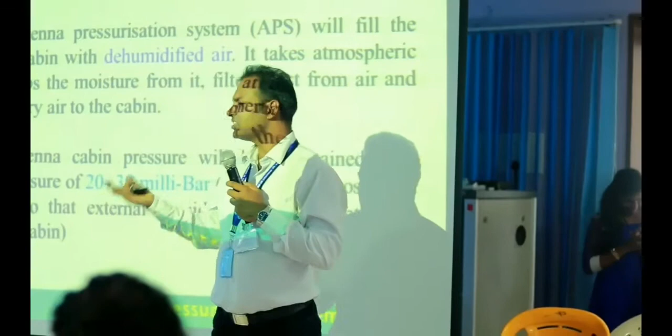But I really don't know what is the difference in pressure level from top to bottom. What is the difference, the range? Can anyone tell me, just approximate range? It may be variable, but just guess - a wild guess if you don't know. What may be the difference between pressure on top of the fin and on the bottom of the fin? Just a guess, tell me any figure.

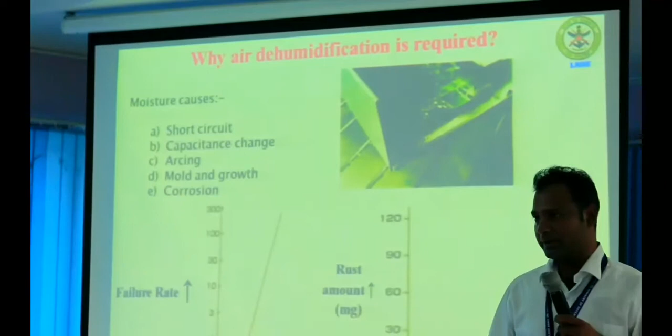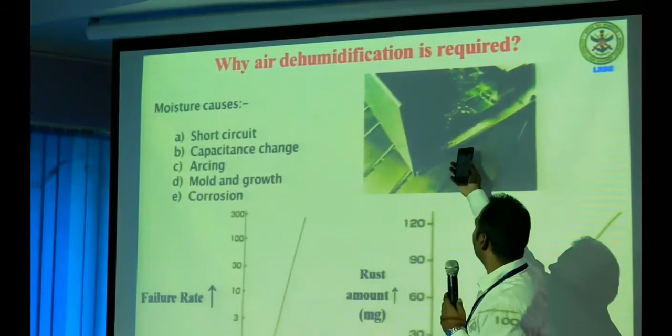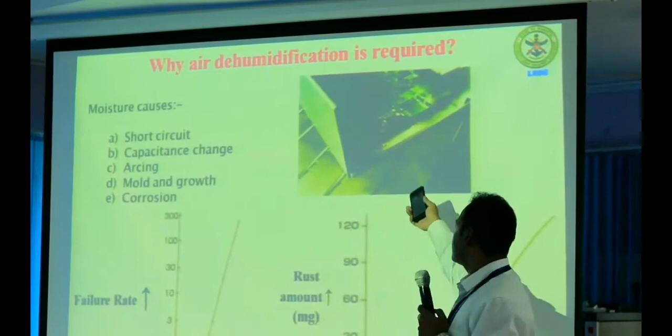What is the problem with moisture in the system? As you may know, if moisture is there, this picture shows deposition of moisture on this cabin, which is called the cabinet of the computer. Inside there is a deposition of moisture. If such deposition happens on any electronic system, there will be a short circuit.

Then mold growth. Mold is a biological formation you might have observed on some systems. If it is kept in a humid environment, biological growth happens on the system. So these are the problems associated with humidity, which is why this dehumidifier is required for the radar system. Corrosion also happens.

It is seen that if humidity level is between 40 to 60, rust formation is minimum, similar to how failure rate is dependent on temperature.

Can anyone guess what happens if humidity is 0%? There will be a problem for us too, we will feel very uncomfortable. In the same way, electronic chips also cannot survive at 0% humidity. Pure air is also not good. If humidity is less in the atmosphere, we feel uncomfortable, and chips will degrade. Moisture will constantly come out from them, and they will slowly degrade. It is an observed phenomenon that if moisture level is kept from 30 to 40%, it gives the best performance for the system.

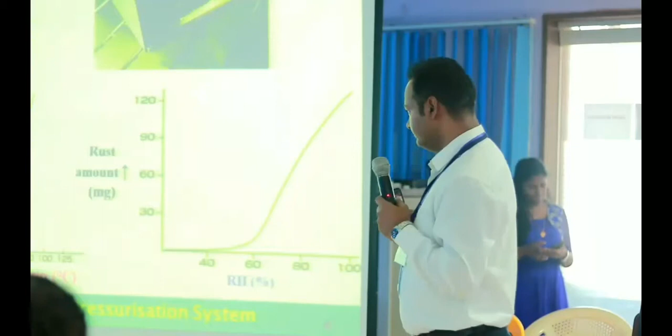So what was the requirement? I know all of you are feeling hungry.

Based on the antenna cabin size, it was required that the system should provide 1650 liters per hour, based on the size of the cabin. The pressure requirement was that it should be above atmospheric pressure. Then humidity reduction required a 20-degree dew point reduction, covering up to 95% of the humidity level in the air.

Then there was the size constraint. Initially the constraint was that I had to design a system that should be half meter by half meter by half meter, a cube of half meter edge length, but it could not be done. So later that constraint was revised to 0.6 meter by 0.6 meter, and height was strictly limited because the antenna was rotating, kept on a pallet where there is a stationary portion. So the gap between this stationary frame and the antenna was only 600 mm, and some clearance was also required, so height was strictly restricted.

Apart from that, there were some weight constraints, because it is a mobile radar on a vehicle, so weight should be less, power consumption should be less, and it should have a remote communication system, so Ethernet links and all.

This is the calculation. I will not go through the calculation of how this has come, the flow rate requirement.

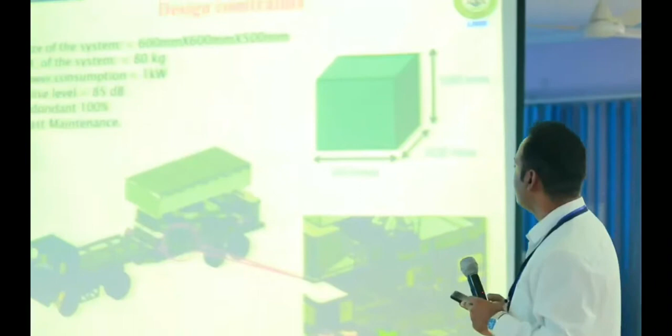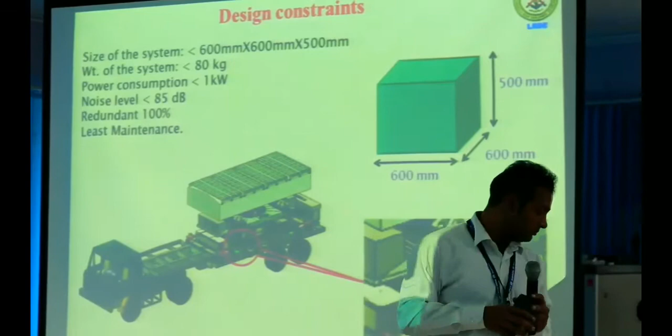This figure may make it clear: this system is mounted here, and this whole thing is rotating. Once it is transported to some site, it will deploy itself, and then it will rotate. So the system I have designed is kept here, and this platform is rotating, and below this platform this height limitation was there.

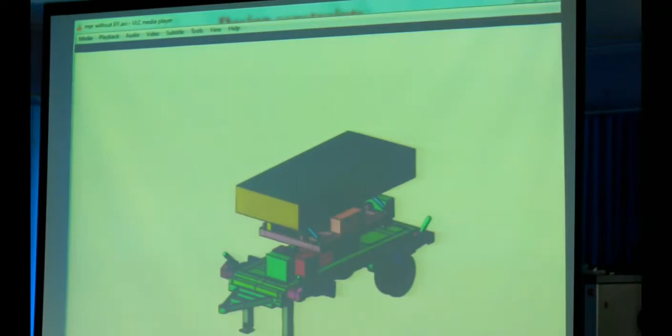That's why I wanted to show this video. This is just an animated video, not an actual video. I have an actual video too. Can you please close it?

Now I'm going to explain how moisture can be separated from air. One way is, if we cool the humid air, moisture gets separated, it becomes dew, and it gets deposited on the surface.

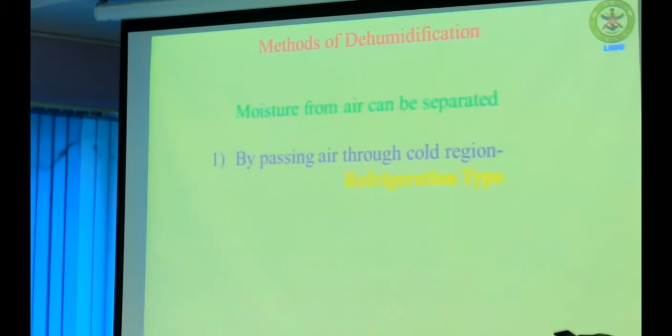So it can be separated by passing air through a cold region, and based on such a system, the dehumidifier is called refrigeration type. Systems based on this are slightly bulky.

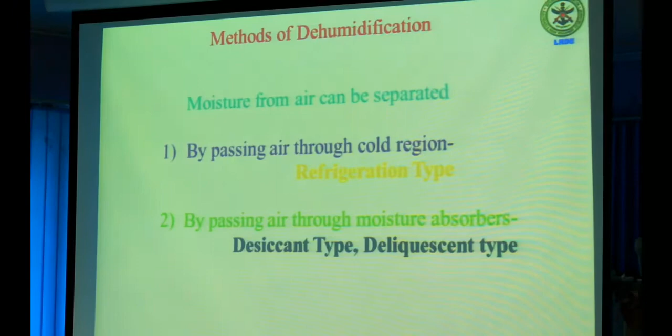Another way is that if I pass the air through some material which has a high affinity for moisture, it will be absorbed by that system. Such material, which has a high affinity for moisture, is called a desiccant. There are some well-known desiccants like silica gel, alumina and others. I will talk about it later.

Another way is to filter it. If we have a micro filter, and pressurize the air and pass it through that filter, moisture will be separated. Based on this principle, the dryers are known as membrane dryers.

I will not go through this, because all of us are feeling hungry.

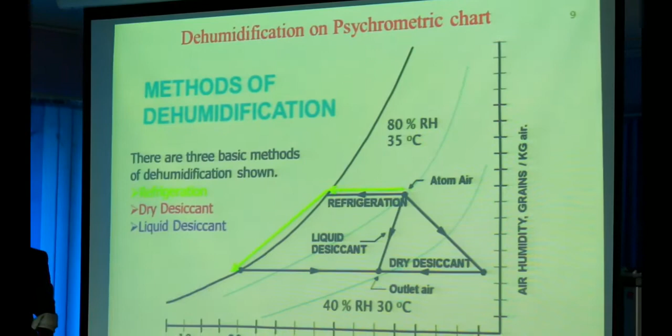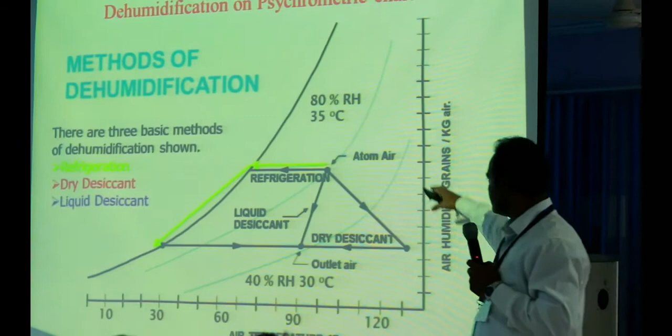This shows all three processes and how they happen. If we take the refrigeration type, first air will be cooled to the saturation temperature, then with further cooling this much moisture will be separated out, and then it will be reheated, finally giving an outlet at 40% RH.

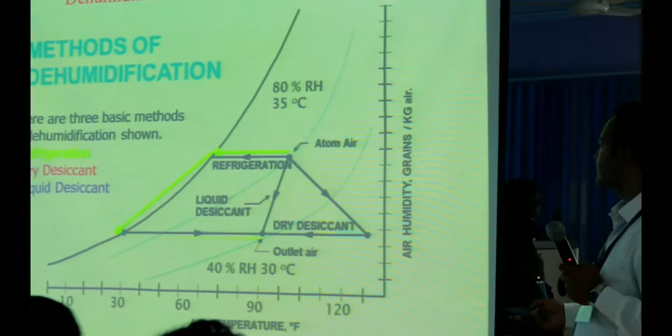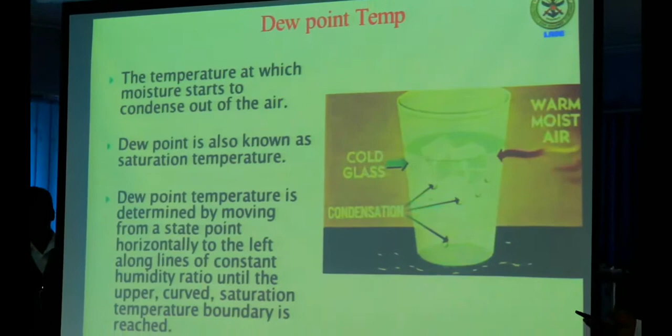And if I take the dry desiccant type, it happens like this. Let us not talk about that. Can anyone say what dew temperature, or dew point temperature, is? Any one of you?

Suppose today there is 85% humidity in the air and the temperature is 30 degrees. What will be the dew point temperature? Approximately, above 30 or lower than 30? Lower than 30. If I cool that air to maybe 27 or 26 degrees, it will start condensing. So that temperature is called the dew point temperature, and it depends on how much percentage of humidity is inside the air. So that is the idea of dew point temperature.

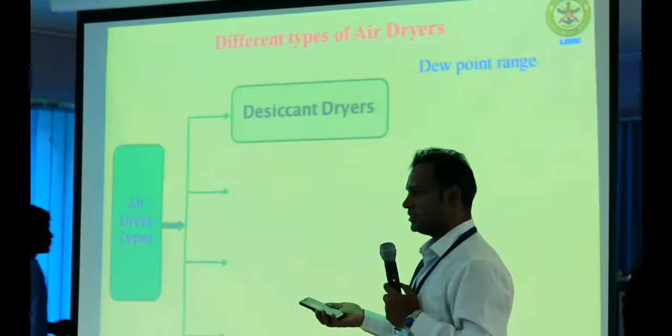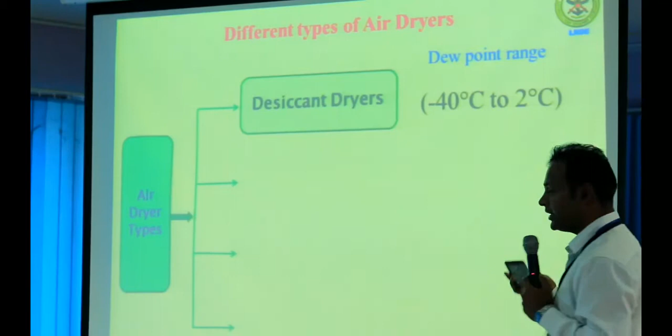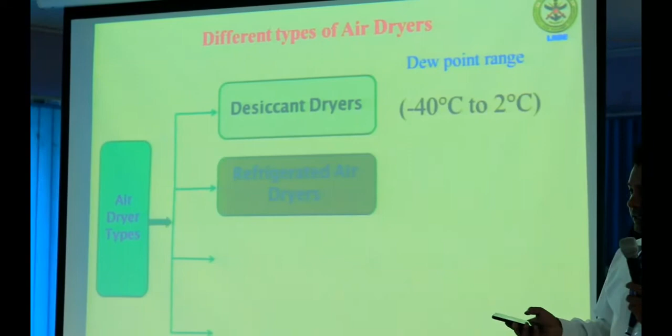So there are basically 4 types of air dryers, based on different principles. If we pass air through material which is more hygroscopic, it absorbs the moisture, and based on that, dryers are called desiccant dryers. Here we can have a dew point range for output air from minus 40 to 2 degrees. And if we go for refrigerated type systems, this can give us dew point range from 0.5 and above. So we cannot have air with dew point below sub-zero with this type.

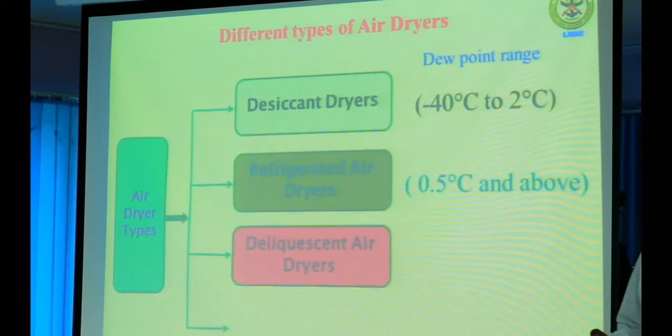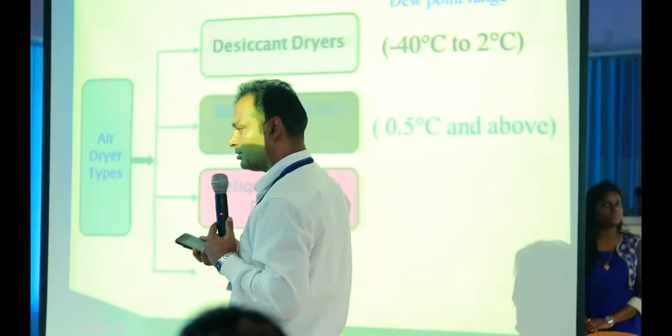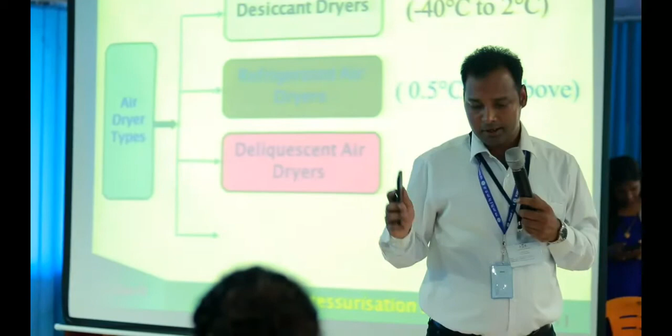Then another type is deliquescent type. Deliquescent materials are such materials which, after absorbing moisture, become liquid. You might have observed salt - once it gets moisture, it becomes liquid. So those materials are called deliquescent materials. So if I want to purify the air, I will pass it through that material, which will absorb the moisture, and my air will be purified. But what is the problem in this? We need to replace it - every time we need to do quick replacement. But in my military application, we cannot have such a system where we need frequent replacement. It should be working for years, and after years, it should be maintained and all.

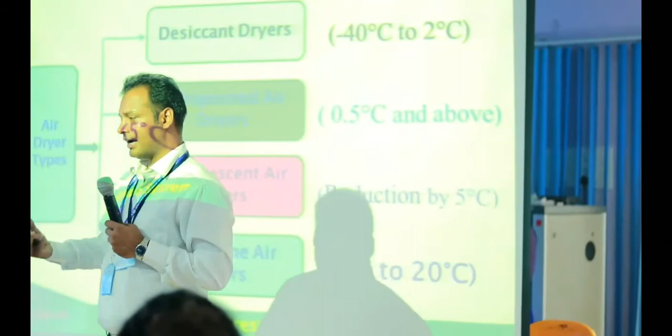Also, reduction in dew point is very less in this type. Similarly, membrane type - membrane type can have dew point only from 5 to 20 degrees. And membrane air dryers need very high pressure, because to pass through the micro pores of a filter, we need to pressurize the air at very high pressure. So those are the problems.

So there are 4 types of air dryer. I will go through the details of those dryers one by one, and then I will tell you why I have selected a particular type of air dryer.

Do you guys find me interesting or boring? It's a bit slow, sir. Going a bit slow. Oh, a bit slow.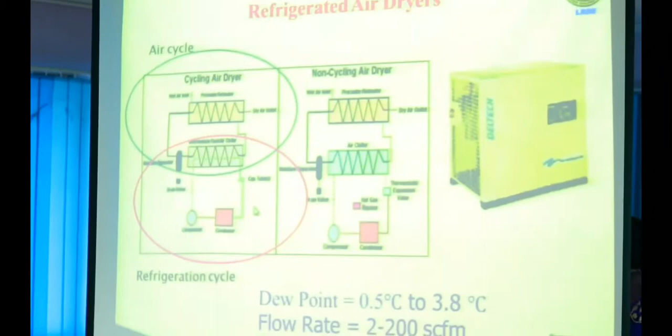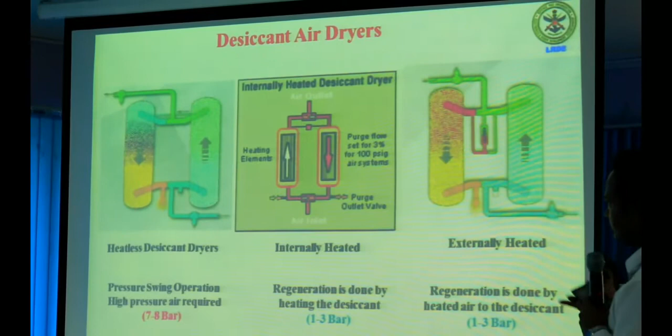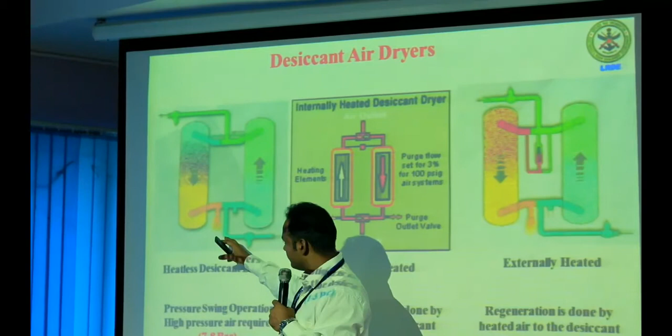How desiccant dryers work - I'm going into internal details of the system. There will be 2 towers filled with desiccants. Moist air will be passed through one of the towers, and this tower will absorb the moisture. Slowly, after 1 hour, depending on the moisture content of the air, that desiccant will become saturated. It has a limit to how much it can absorb, right? So after some time, it will be saturated and further purification it will not do.

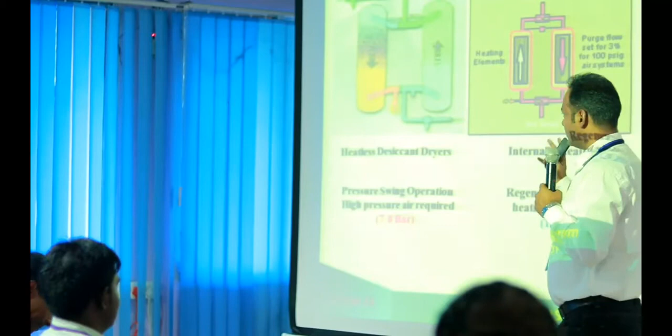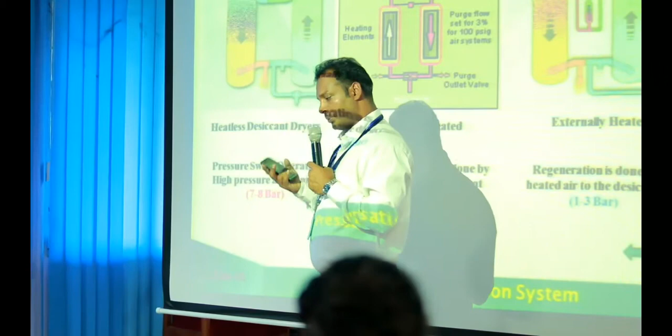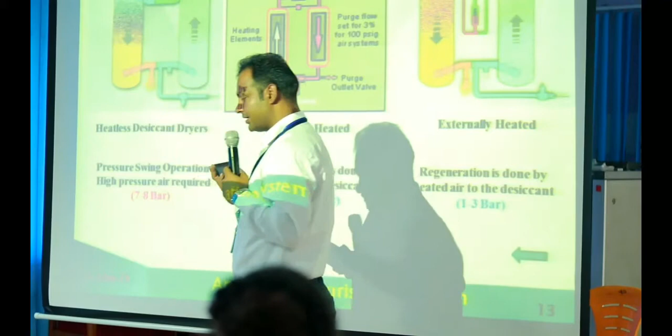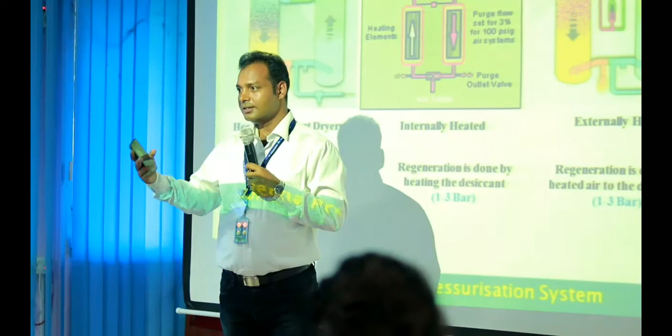So after some time, some flow control switches will pass the moist air to the other tower, and this tower will be heated or passed with low pressure air, so that it regenerates. So there are 2 processes - one is generation, another is regeneration. Generation means removing the moisture from the air, and in regeneration we remove the moisture which is absorbed by the desiccant, so that it can be used again.

So what is happening here - this tower is being generated, air is being purified here, and at the same time another tower is getting regenerated. Here this air is taking all the moisture from this tower by heating. So we don't need to replace the desiccant. After some time, this one gets regenerated and this one gets generated.

In this there are 3 variants. The first one is called heatless desiccant air dryers. Here there is no heating required, but what is required is very high pressure.

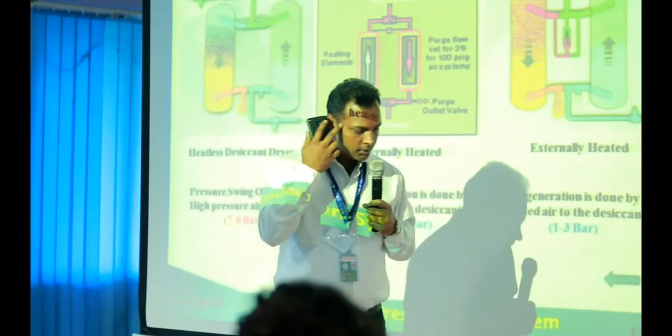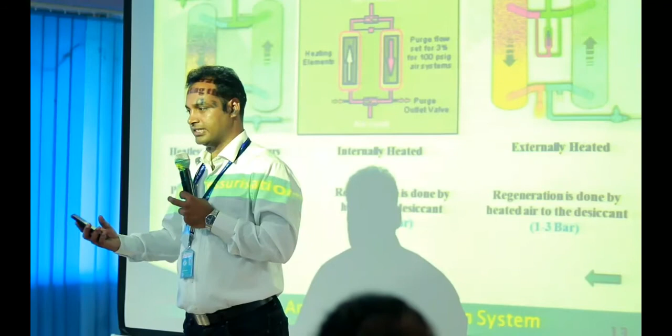Because of the concentration difference, moisture will flow from air to desiccant. In the regeneration time, low pressure is passed through that desiccant, so that because of the concentration difference, moisture from desiccant to air will pass.

Another problem associated with this is we need to create very high pressure, up to 8 bar.

So in order to accelerate the process of this desiccation and regeneration, some heating, if I can heat this element, it can be accelerated, and very less pressure can work, 1 to 3 bar.

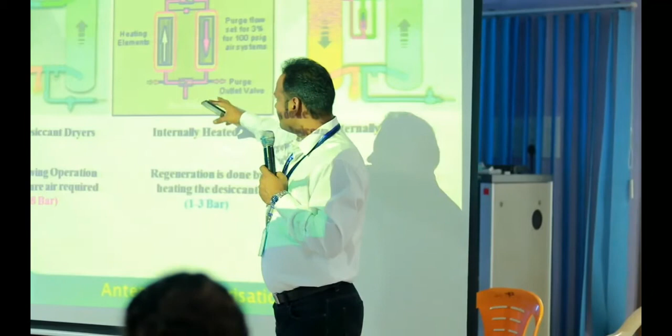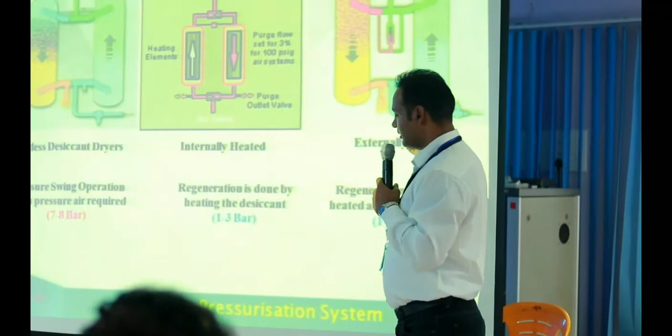And this heating can be either internally or externally. In this case, heater elements are placed inside, heating directly to the desiccant, so desiccant will remove the moisture. In the other case, air is heated outside, and that heated air is passed through.

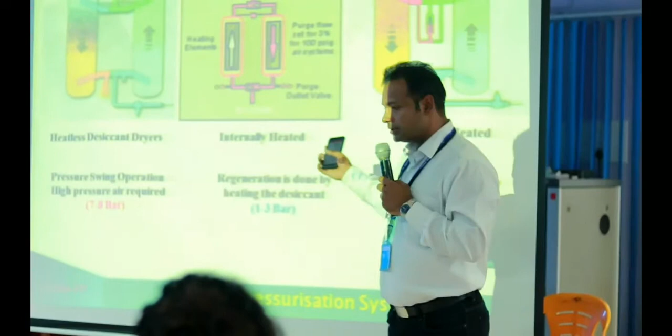So in my case, what I have selected is internally heated type to make the system very compact. So I will directly rush to my schematic diagram of my system.

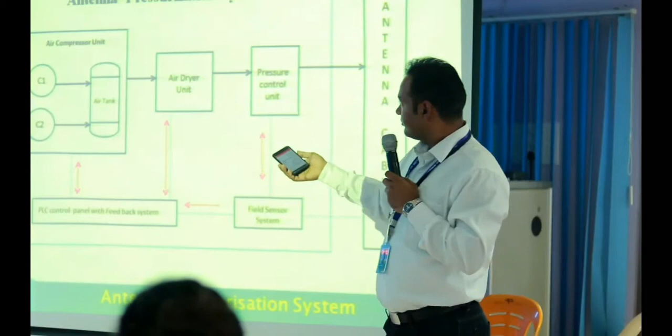This antenna pressurization system has got 4 or 5 units. One is compressor unit that is required to compress the air, then there is a drying unit, that is desiccant tower and all, and there is a pressure control unit. After pressurizing, we need to depressurize it and fill it to the antenna cabin.

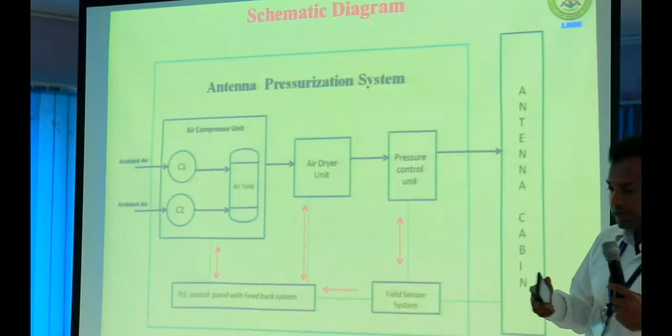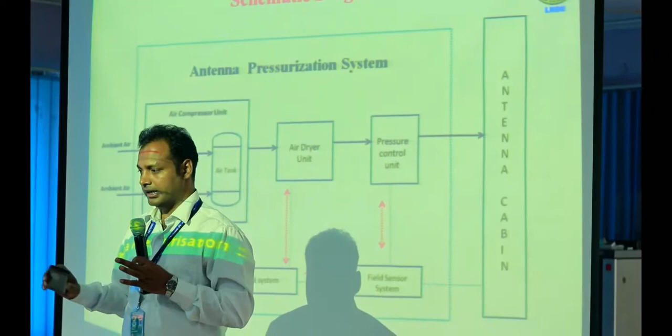The system has to work only when the pressure of the cabin falls below 20 millibar or the humidity level goes up, otherwise the system has to keep silent. Its function is not a continuous function, so for that we need some control.

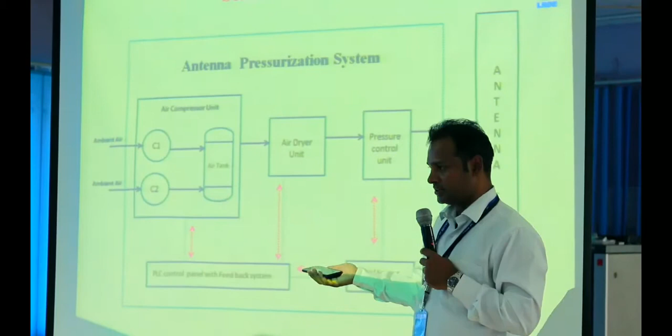So we have a field sensor system which will sense the pressure of the cabin and moisture level, and then in order to do it automatically, there is a programmable logic controller which controls all these operations.

So these are the internal details. We have 2 towers, desiccant tower 1 and desiccant tower 2, and air is pressurized by compressor 1 and 2.

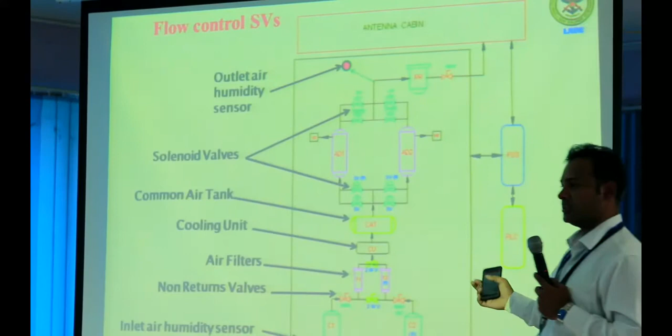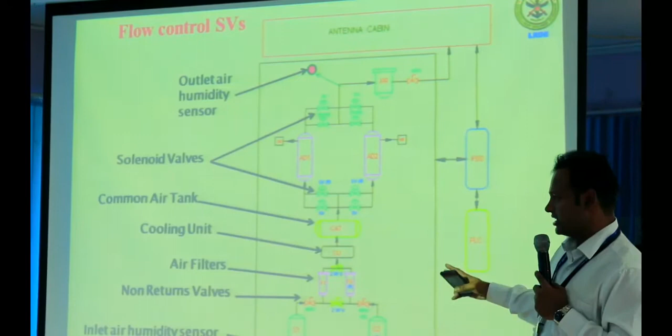There are two compressors. Actually, one compressor can work, but for increased reliability of the system, one redundant compressor has been used. Wherever there is a chance of failure, like solenoid valves, which are electromechanical systems, chances of failure are more, so there we have provided redundant components. Full redundancy was not possible because of the space constraint.

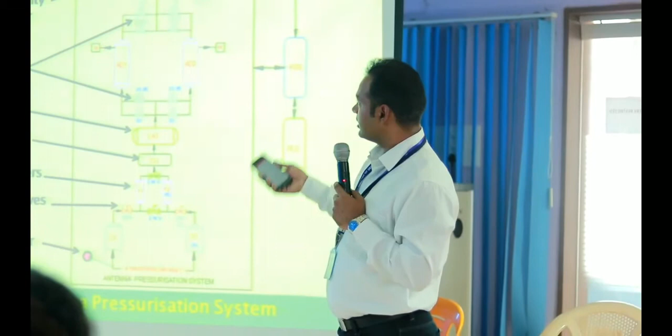So what we have is a humidity sensor at the inlet, also at the outlet. We have solenoid valves. We have one tank to store that air, then we have two compressors, then we have multiple solenoid valves, and of course we have air filters. Apart from that, we have field sensor systems and PLC systems.

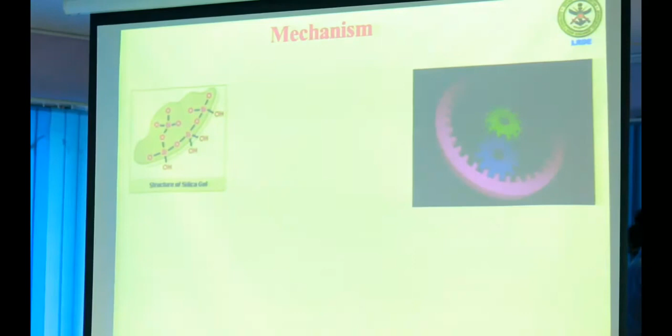So what is the mechanism in desiccation? This hygroscopic material, called desiccants, has electronegative bonds at the top, and all of us know how hydrogen bond formation happens. So on the surface of this desiccant, water is trapped by hydrogen bond.

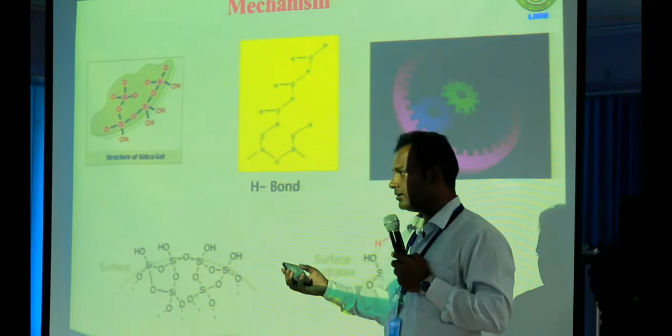This moisture content, which is H2O, sticks to that surface with hydrogen bond during the adsorption phase. Moisture from the air sticks to the surface, and moisture-free air passes out. Once we heat it, this H2O goes back during the regeneration time.

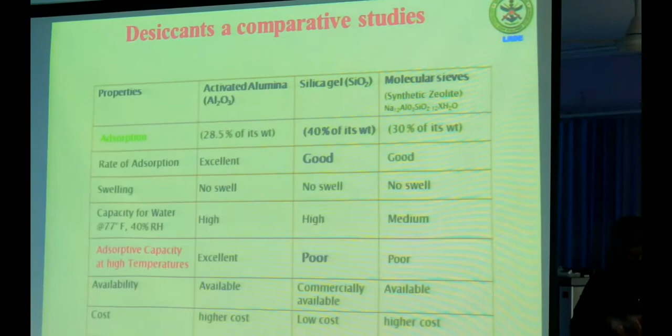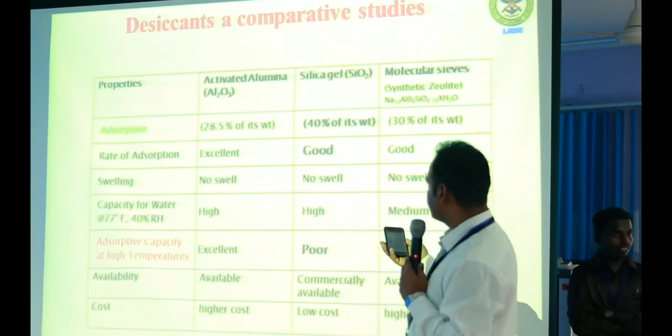These are the comparative studies of various desiccants, and the desiccant I have selected is the one which can absorb most of the moisture. That means silica gel has got two good properties: it can absorb up to 40% of its weight, and at the same time it has got poor retention capacity at elevated temperature. That is good for me.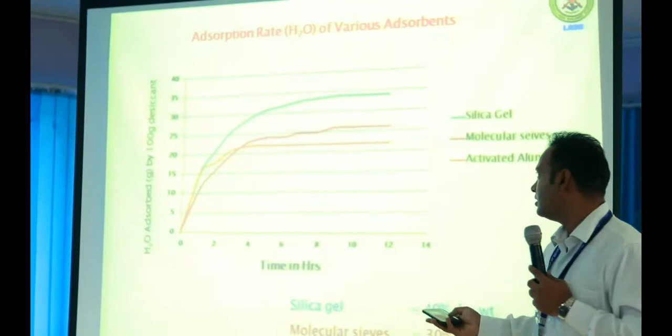If I heat it slightly, it will remove all the moisture, so regeneration will be better. That's why silica gel has been selected for this purpose.

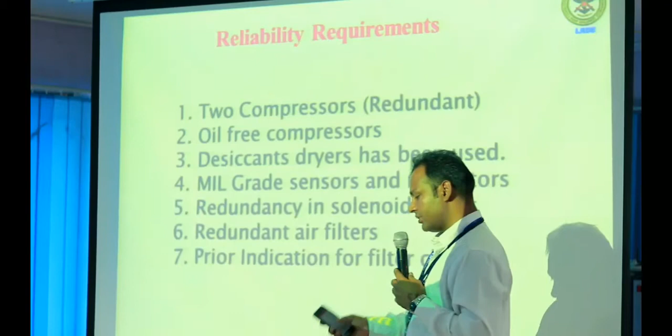So for the reliability requirement of the system, we have two compressors, one redundant. Actually one compressor is enough to work, but one will be in standby. If one goes bad, another will take over automatically.

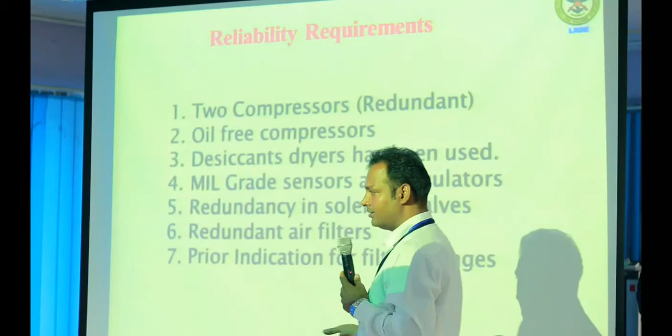Then we have used an oil-free compressor, so we need not oil it, so that for years together it can work without maintenance. And a desiccant air dryer has been used, so that we can regenerate the desiccant itself, no need to replace it.

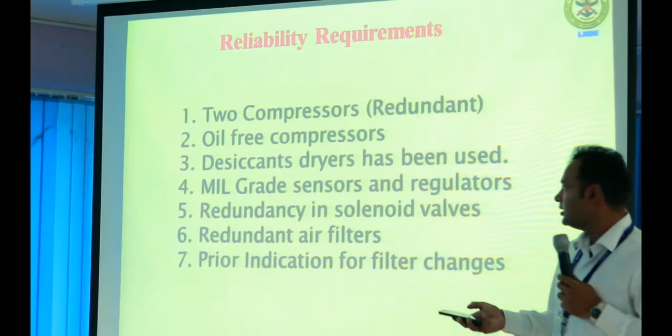Then all sensors and regulators have been chosen to be mil-grade, and there is redundancy in the solenoid valve, which is a very active component.

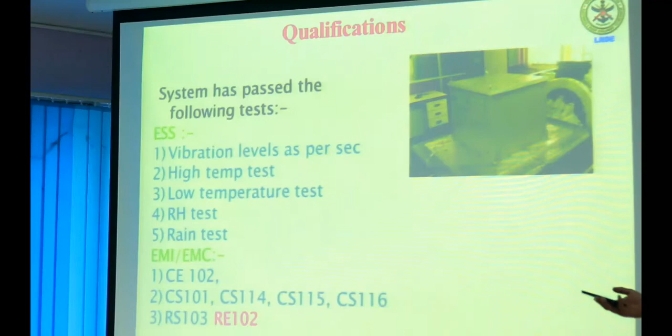And the challenges were packaging everything in a small box, then selection of components, and then how to route all those systems, then safety and qualifications. It has gone through environmental qualification as well as EMI/EMC qualifications.

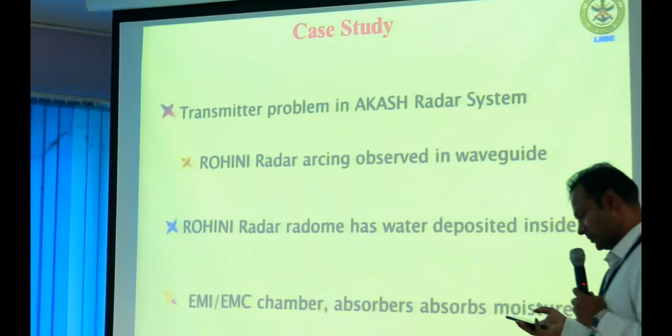And these are some of the case studies which have been observed, showing that this system is very much required. If this system is not there, these are the problems that have happened.

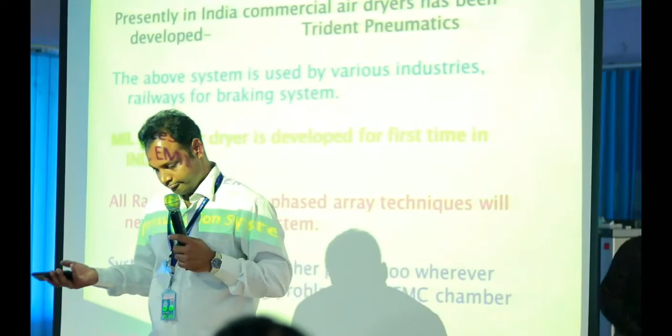In conclusion, what I can say is that this system has been designed for a mobile radar. It can be used for similar such radars also, anywhere.